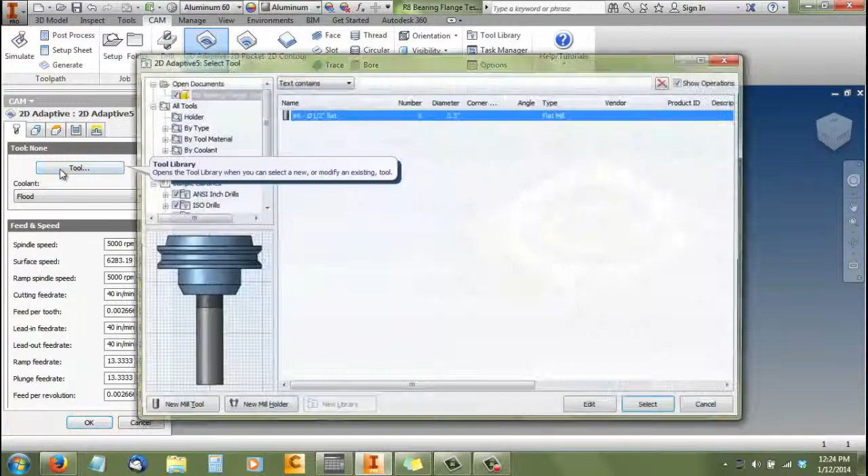We're using tool number 6, which is a 1/2 inch 2 flute end mill, something that I've already set up. We'll do a whole separate video specifically on setting up a tool and the reasons we do what we do. Under general, it's tool number 6, offset number 6, length offset number 6. That's important. You want your length offset and your tool number to be the same, and diameter offset number 6. This just helps from an organization.

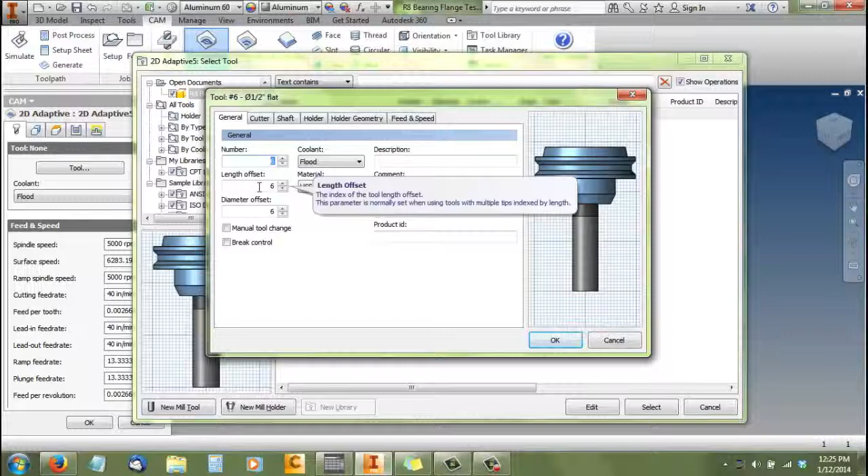You know that when you're dealing with length offset in the G code, number 6, you know that it goes to tool number 6. Doesn't have to be that way, and there are maybe a very few reasons not to do it that way, but there are an awful lot of reasons most of the time to do it that way. This defines the size and the shape of your end mill. Straightforward enough. And then the speeds and feeds, which is something a little bit more tricky. And again, we'll probably do a video specifically on speeds and feeds.

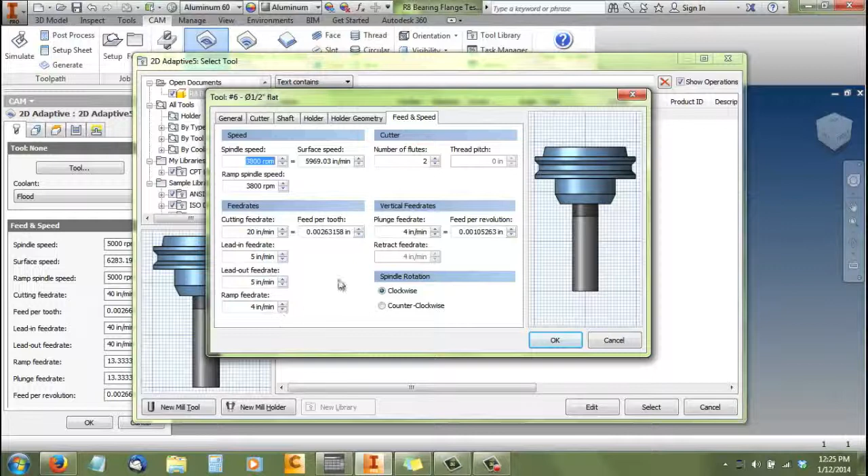Using some other software, we were able to determine the speeds and feeds, and these are appropriate for the milling strategy and material. We're running the mill at 3,800 RPM. We're going to use a cutting feed rate of 20 inches a minute. And very, very slow lead-ins and very slow plunges. And this gives us a chip load of about 2.6 thousandths. So that's pretty light, to be honest with you, but very appropriate for what we're trying to do here.

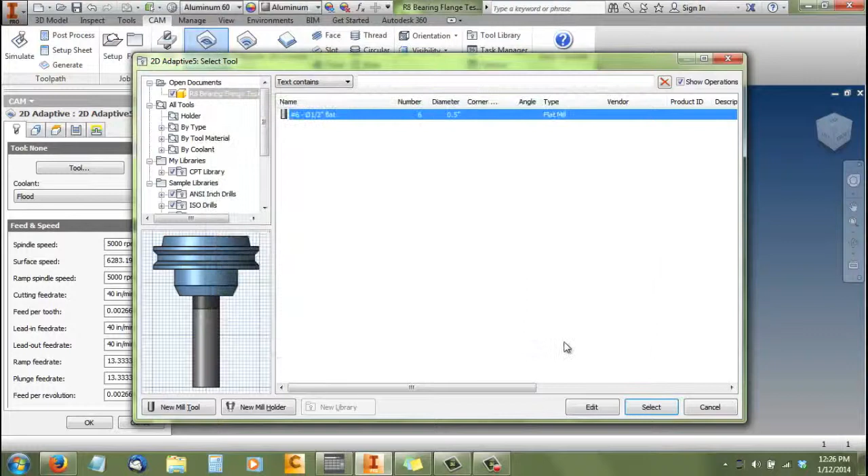So we've got tool number 6 set up and chosen. We're going to go here. Okay. Let's see. The first strategy is I'm going to just clear the outside of the whole part. I'm not going to try and face it down or anything like that. I'm just going to take off material around the perimeter. So we're going to get rid of that. By getting rid of the machine cavities, we automatically get stock contours, and that's what we want to do. We just want to machine down to the part using the stock contour.

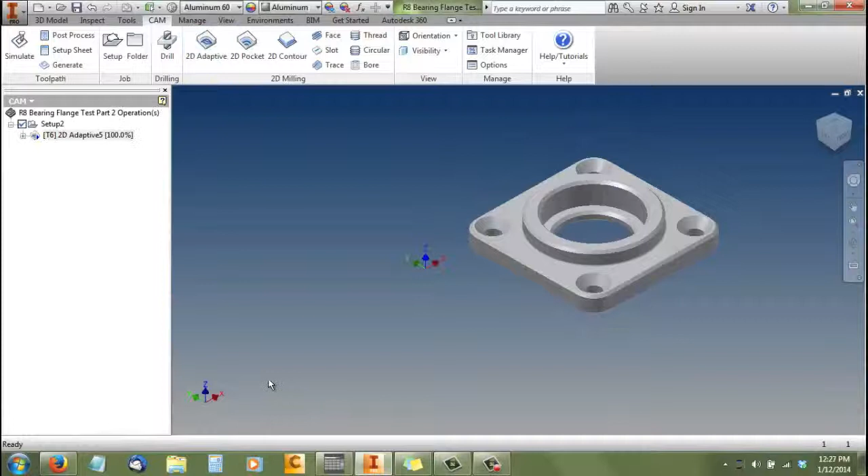And what I can do really quickly to see if everything's going to work out, and making the right choice is always a little bit tricky, at least for me. You just say okay right away. If you get a tool path, you know you're good. You just right click on it again, and so we got a tool path right out of the gate, and that's awesome. We're going to say edit, and so our geometry is correct.

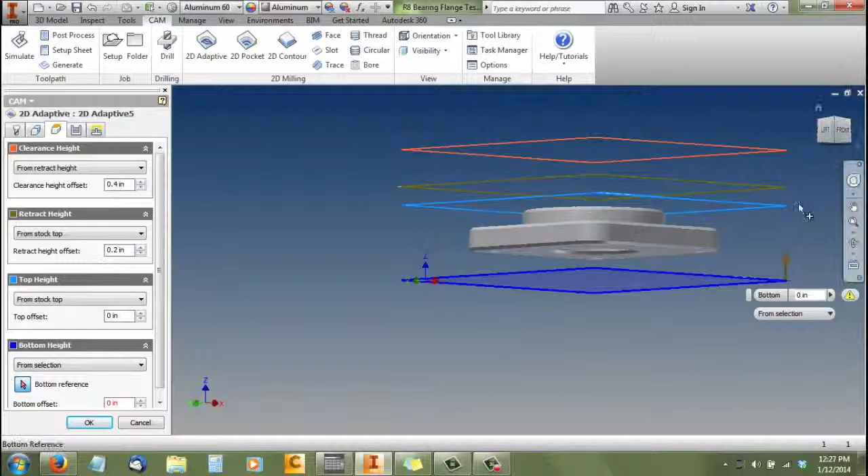We're moving on to our heights tab, and what I really want to do is I want to machine about 20 thousandths lower than the bottom of the part. So what I'm going to do is scroll around here. I've highlighted the bottom of the part, and I'm going to say minus 0.02. So now I've just put the depth that all the machining is going to happen at about 20 thousandths lower than our part.

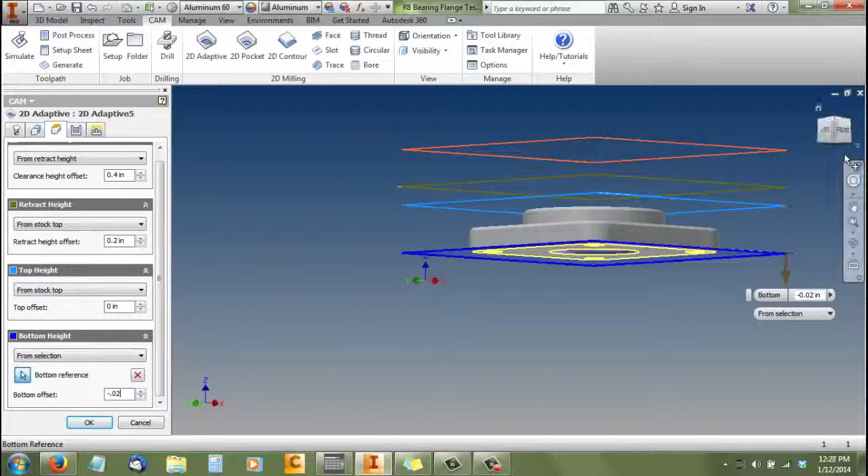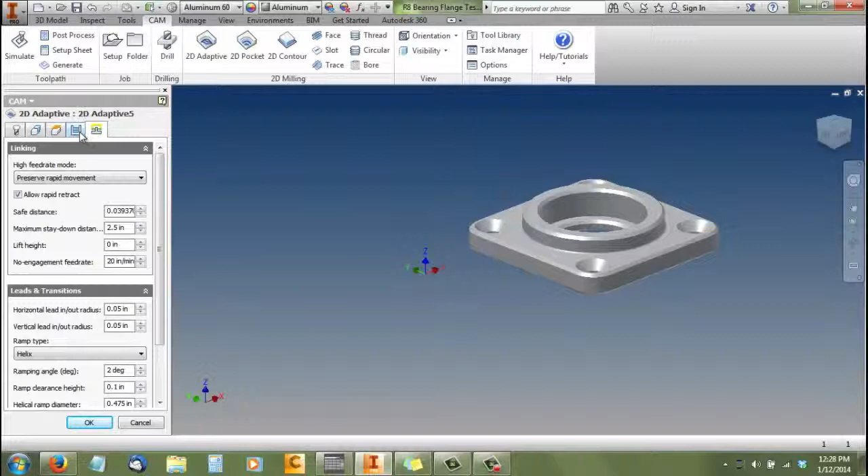Basically the strategy is we're going to rough out and finish all the top bits of this part, almost the whole part, and then we'll flip it over in the vise and just mill off the rest of the stock. Pretty simple, pretty standard strategy. Leaving stock, we want to leave a little radial stock because we're just roughing this and we want to finish. We don't want to leave anything axially, so we'll just put 0 in there. Lead ins, lead outs, we'll just leave alone. We'll say OK, see what we get.

OK, and we're going to make one more edit. Looking at the toolpath, right now I really want to step over 20 thousandths of an inch. What I'm doing is I'm moving right along. I have a fairly high speed on the tool and I have a fairly high feed, and I'm just going to take very light cuts.

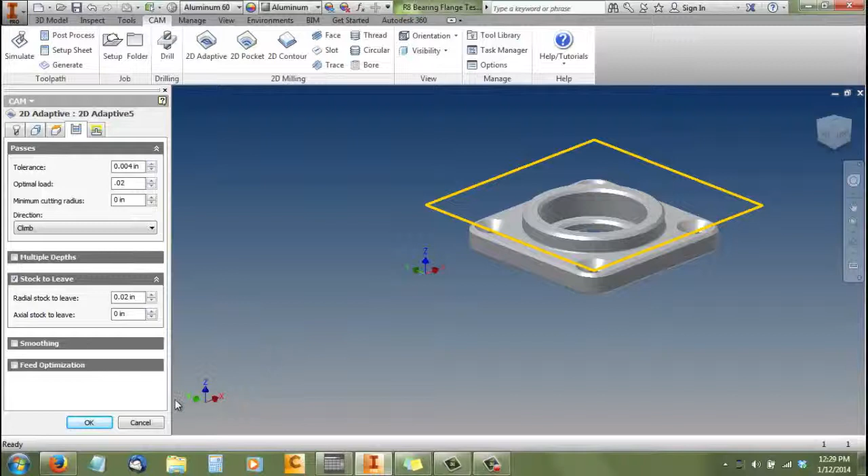This allows you to machine a little faster, and I'm also using the side of the end mill to mill. So I'm starting out with fairly deep cuts but very light, and I'm using the side of the end mill. This strategy is practical in that you use a lot of your end mill, and you get a lot of material with very little horsepower. So that's the trick there, and that's what that looks like.

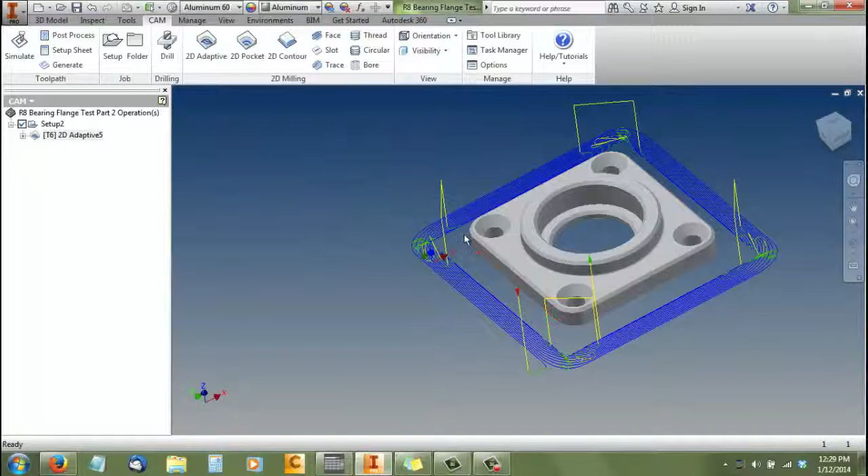So basically this is the tool path, and we've roughed out just the outside of this part, and we'll show you a simulation of the whole thing at the end, but I am trying to move right along. So we've cleared the outside of the part. Now we're going to clear up to this boss part. We're going to use a 2D adaptive clearing strategy, the same tool, same speeds and feeds, and what we're going to do is we're going to machine from there.

So what I've done is I've selected the outside contour when enabled. Let me see if I can leave that little note up. No, it won't stay up. Okay, so in the note here you can see the enabled portion, and that's what we've done, and we've selected the contour of the part. And actually that part looks just like the part I'm making. That's pretty amazing.

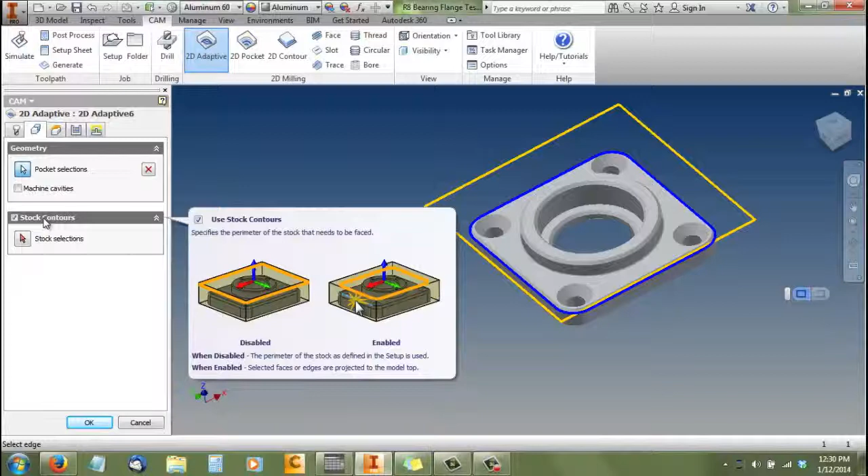So now, let's see if I can get rid of that. Yeah, I am going to now make, there's that. And then I really want to collect that to be there. Good. So now I'm machining between this yellow line and this blue line, and we've got to be careful about our heights. But what I'm going to do real quick is just say OK. Make sure we got a toolpath that's legitimate.

Okay, so we've got a toolpath that started out here. It's not the one I want, but the machine understands what I'm trying to select, and that's the trick I'm using there. So now I've chosen my boundaries. I'm going to choose my heights, and the height I'm going to take, I am just going to select it, and that's just this face here.

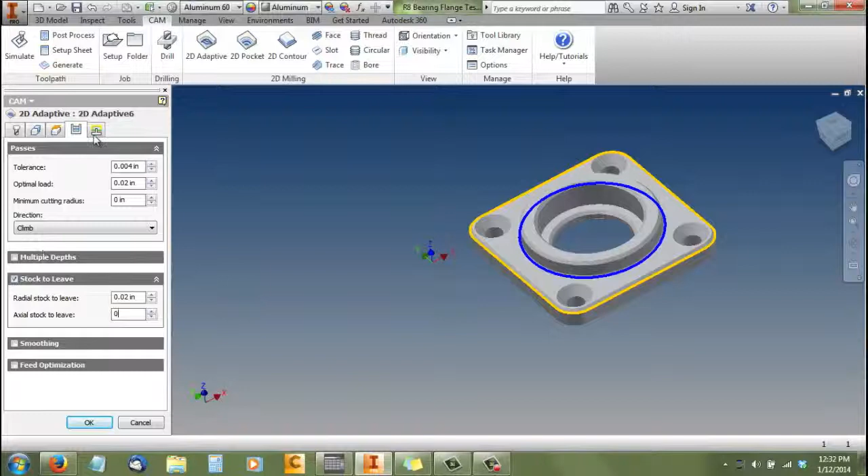And then I'm going to move along here, and the optimal load here is 20 thousandths again, for the exact same reasons as prior. And I'm not going to leave any axial stock, because I'm not going up to the edge of that boss. I'm just going up to the radius, and when we finish it we'll use a radius tool. So we're going to make that 0. And single depth, part of our strategy, leads in, we say OK, and there it is.

So now relatively quickly, without much ado, we've roughed out up to this boss. And then the one final bit is we're going to take off the stock on top here, and we're going to use a facing strategy to do that. Again, same tool. And we're going to make a selection here. This is the area that we want to face, and now having that line highlighted, that makes that good. Our heights, again, we want the top height to be from the top of the stock, and the bottom, we're going to make a selection, and that there is our bottom height.

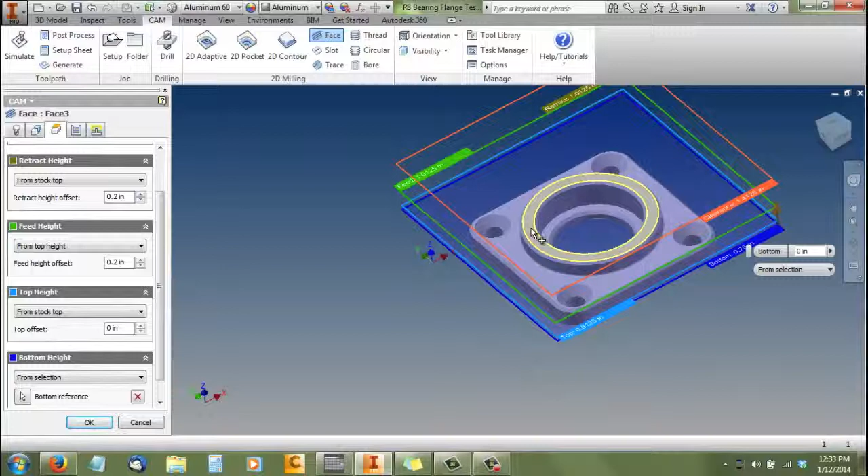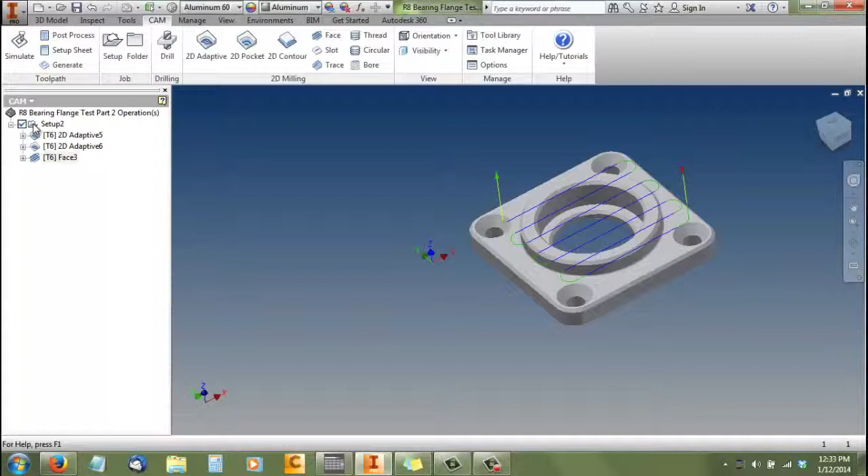And in this case, since we're doing such a light cut, we're going to just step over half the end mill. You know, we're only taking a 60 thousandths deep cut to finish the rest of this material off. So we're going to keep the cut very light. And that should be all that there is to it. So there, good. So now, as I promised, we're going to do a little simulation. We've set up those toolpaths relatively quickly.

And I find simulate all. And we have stock. I'm not going to show the toolpath for clarity purposes. And we're going to push the go button here. So there we go. We're milling around the perimeter. We're using most of the tool. We're taking a very light cut and a pretty aggressive feed. We have about a 3/1000 chip load.

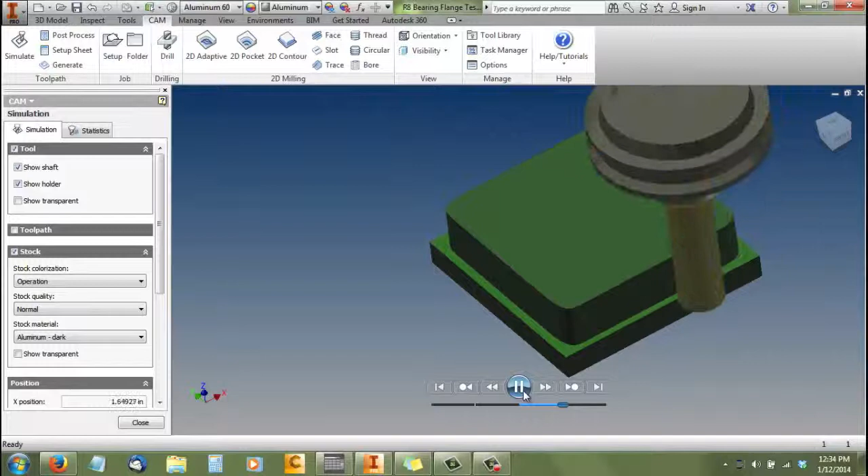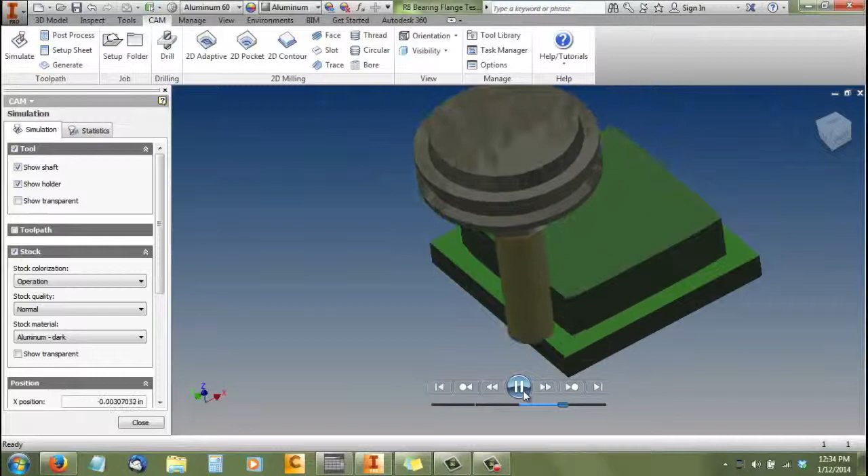All conservative, but you know, a big part of it is about having it work the first time, and if you want to optimize afterwards, that's completely appropriate. Okay, now we're starting on our next tool path, and we're cleaning off to the boss.

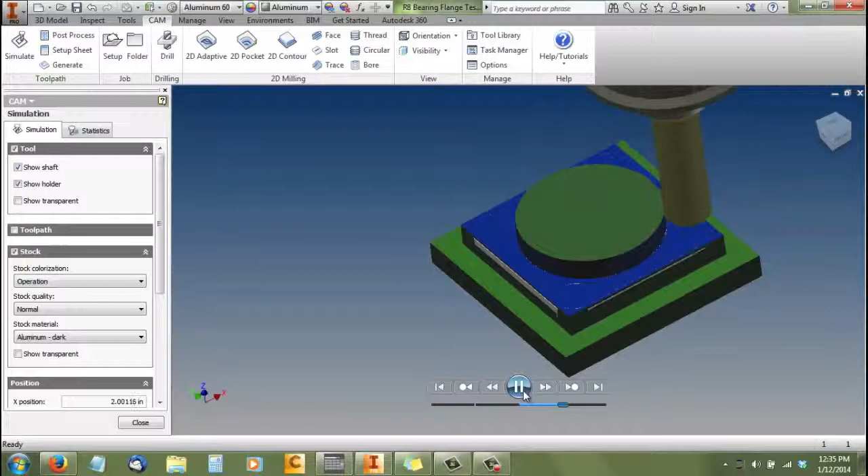And now we're facing the top off, and we have a little stock left, but that won't be a big deal because we're not to finished size yet. If that bothered you, we could make some changes, but really it's a non-issue for this stage of the part.

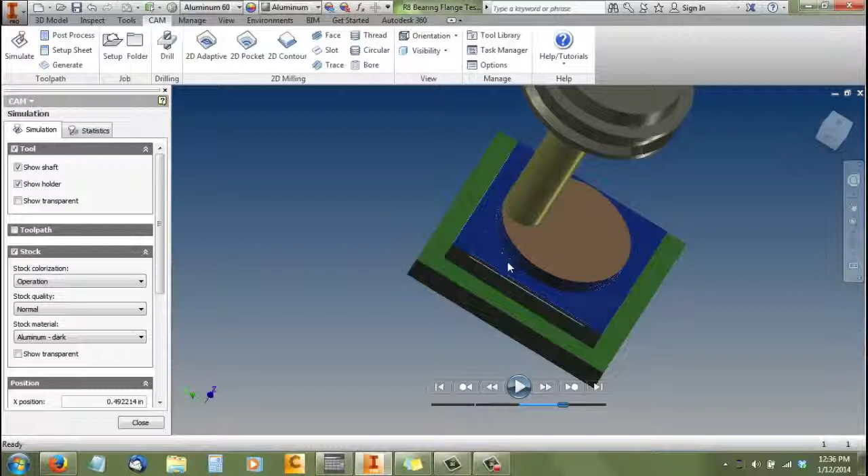So thank you for watching our video. We will be making quite a bit more. Our next video will be roughing out the internal bits of this part, and after we do that, we will then add the holes into the side and do the finishing operations, and that'll make everything to size with very light cuts. Thank you again.